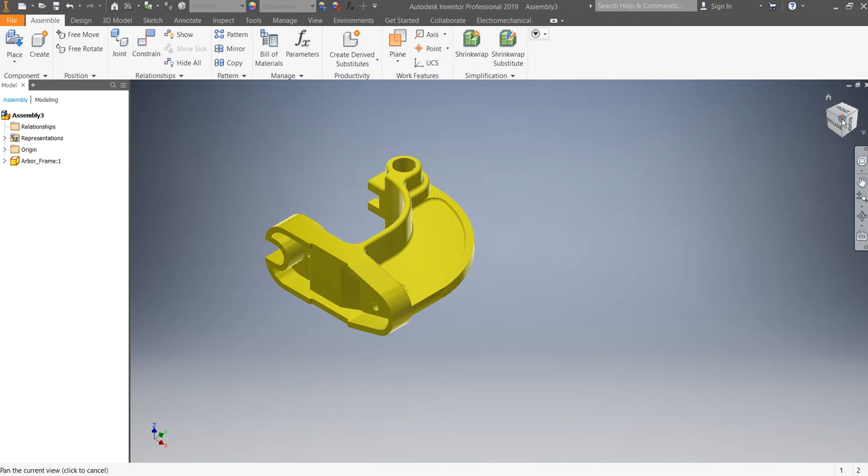At the beginning we have to select the proper view, or you can use orbit like this. Now I have to place, I told you as a designer you should know everything about your design, where is the first part, second part.

So I have finished the Arbor Frame. Now I want to place the plate, the gib plate and the face plate together. No need to place it twice, just once. Before that, I forgot to tell you that the first part, the jig or the arbor frame should be fixed. So I will click on the arbor frame, right click and make it grounded.

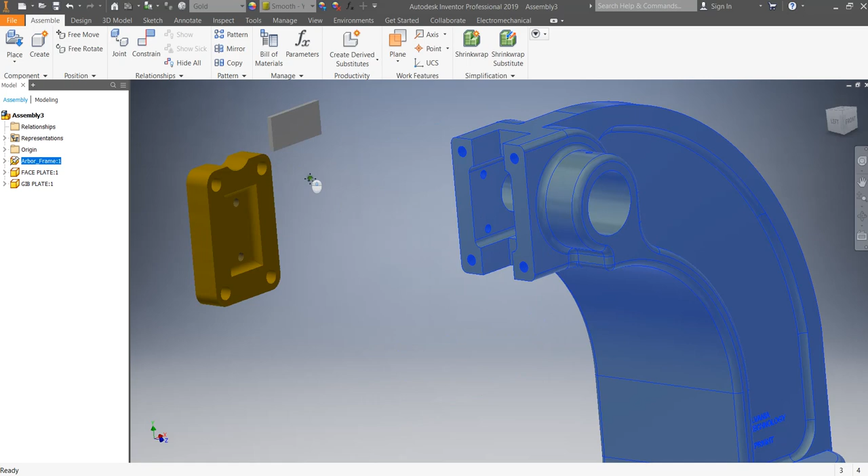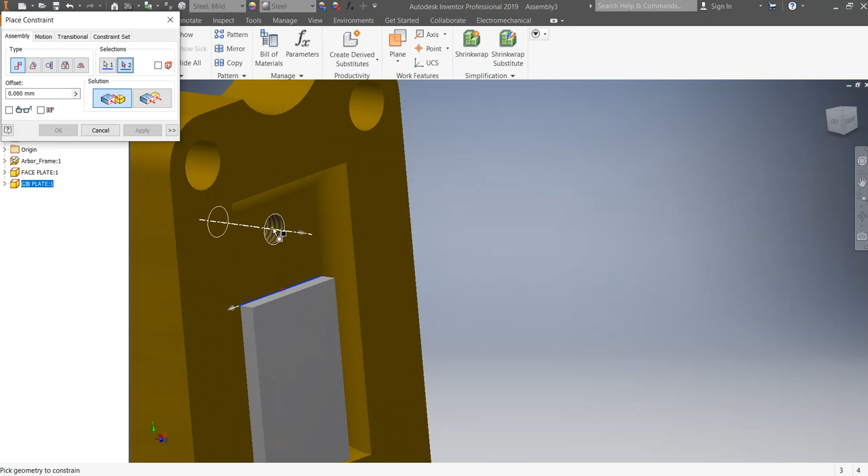Now I will constrain this plate. So this face will meet this face, apply, cancel, make it like this. Then constrain this edge. I want this edge to meet this edge, apply, cancel, move it that little bit down, constrain this edge to meet with this edge, apply, cancel. Now they are one part.

I know that this constrain this surface to this surface, so they are mating together. Then move it like this.

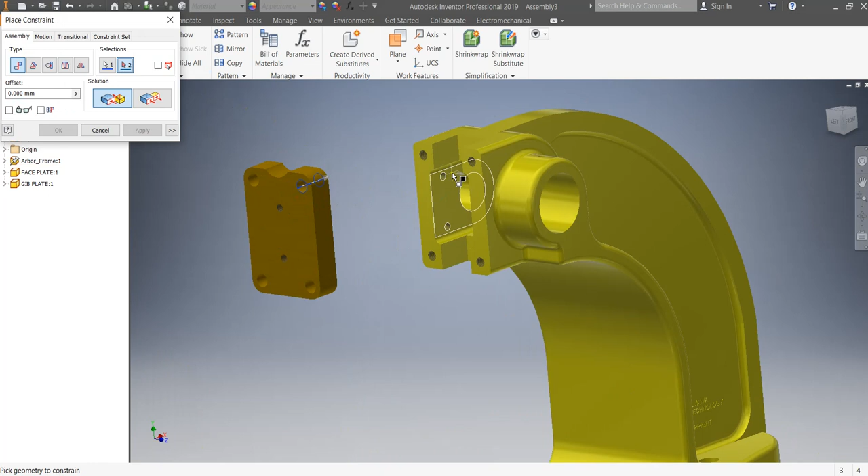We need two holes to place in two holes here. Constrain axis to axis, as you see, apply, cancel. Still it moves like this or rotate like this. We need the other one. Enough. Constrain axis to axis, apply, cancel. Now they are one part.

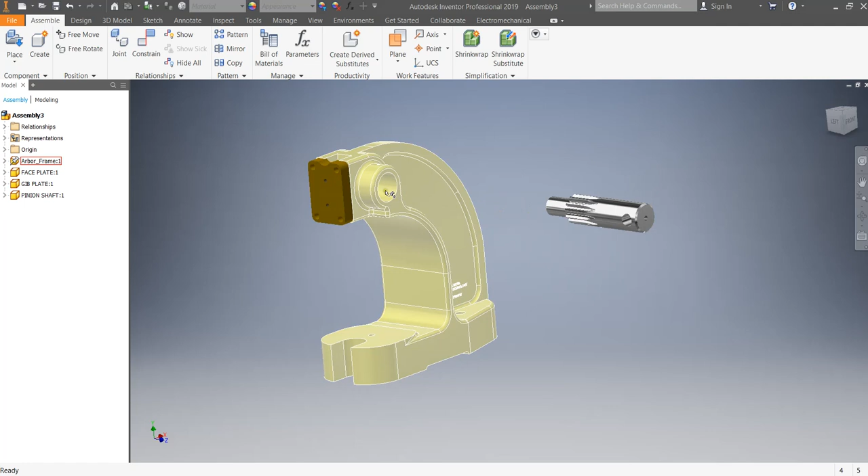Next I have to say place the shaft. We have here the pinion shaft. Place the pinion shaft and know that the pinion shaft should go inside this hole. See, these teeth should be used to move up and down ram. I will place it later.

So I will constrain axis to axis. Sorry, again constrain axis of the shaft with axis of this hole. Then we can constrain flush as example. Flush, make this surface parallel to this surface with some offset. I have to know the offset, how much, say that -20 as example.

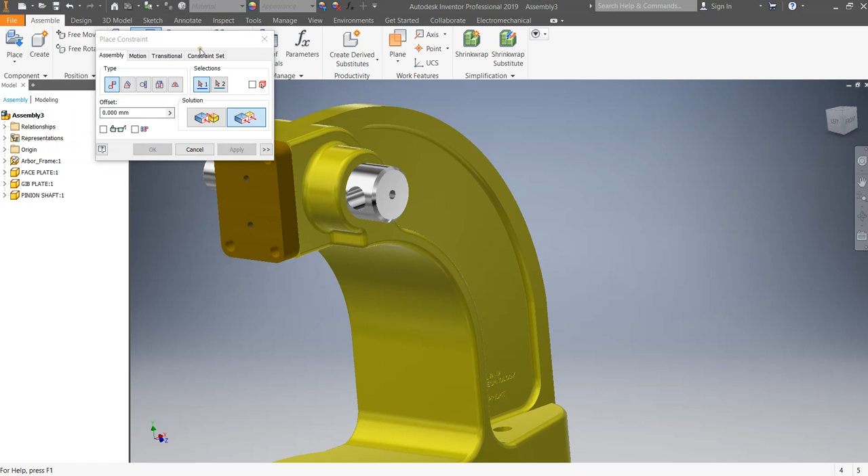I will show you from the left side view like this. Maybe the distance is too much. By the way, this distance is design information, should be known from your design. You have to know exactly what is the distance. So make it -30. I think it's okay. Let me check from top view how or where is the location of the teeth.

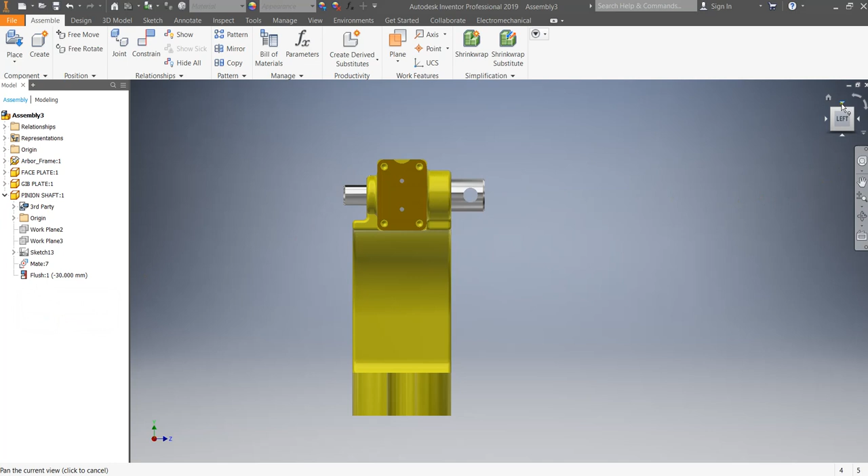Yes, it's okay. Next step, we have to place. Now let me place the ram.

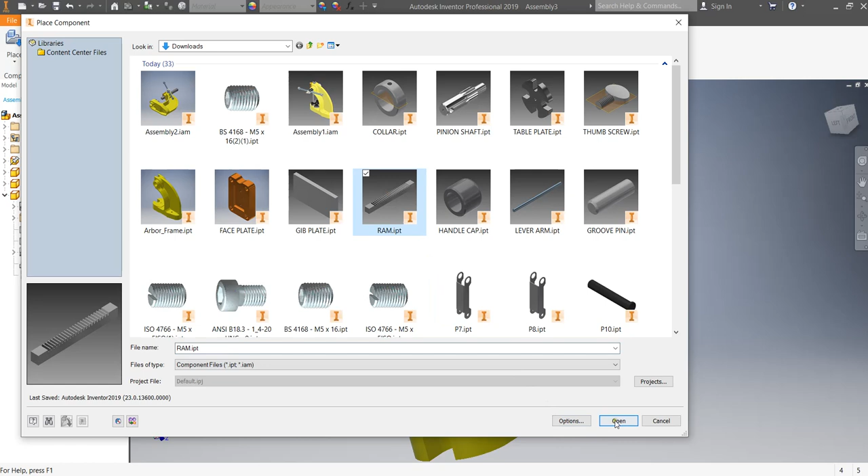By the way, we have another way to place the shaft. We can use, instead of axis and mate face to face by make them parallel, we can use the insert one. We will use insert later with screws and different things.

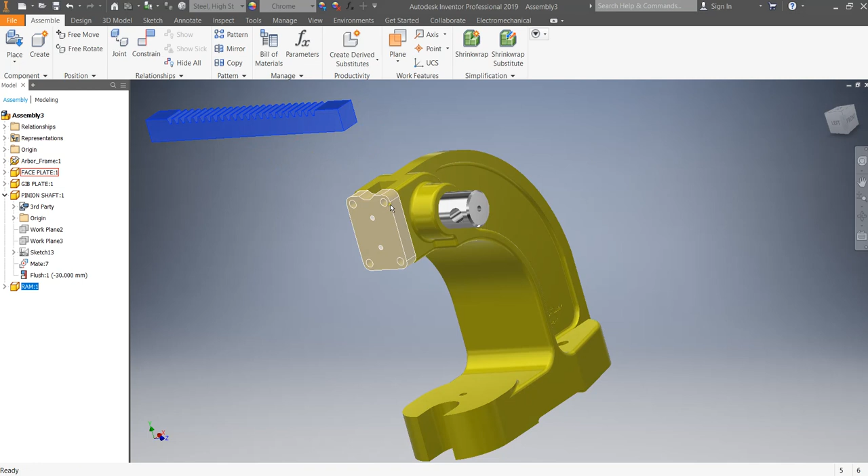Regarding the ram should go inside this hole or inside this gap, so we can go to free rotate and rotate the ram like this.

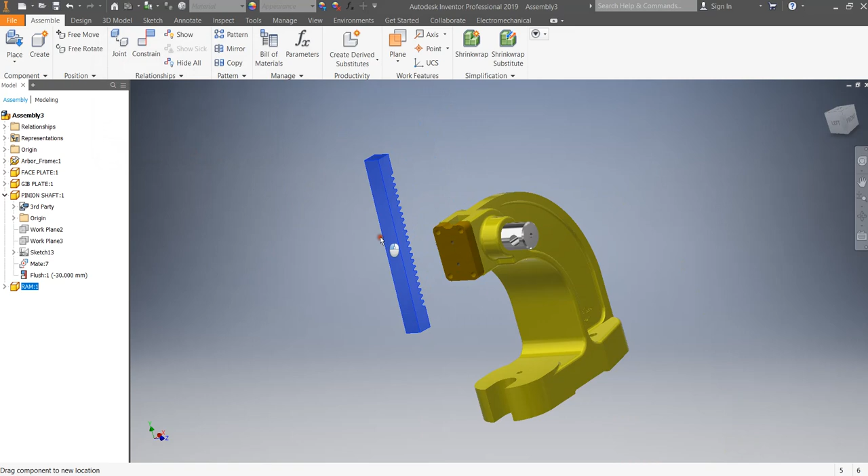For the ram, I want to constrain, mate this surface, the side surface with this side surface. Still, see, it can move in X direction. Actually, let me go and select orbit to move like this and free rotate the ram like this. We can constrain so that this surface mate with the plate surface, apply, cancel. Exactly, this is what we want.

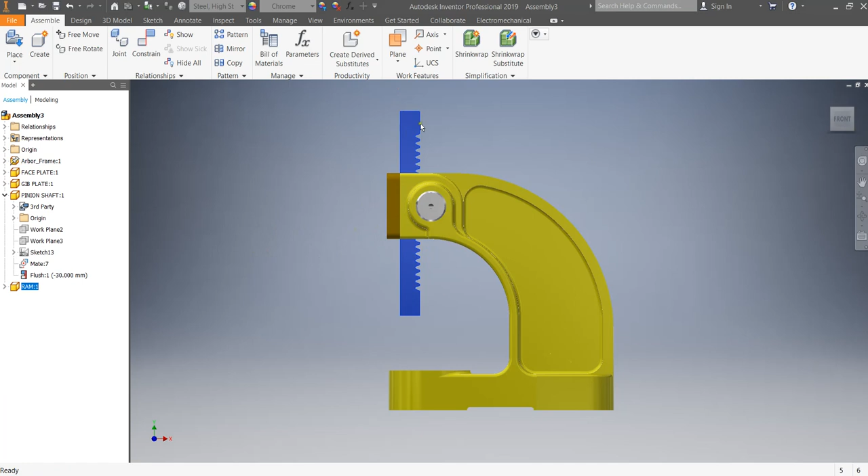I want the ram to go up and down only. I can't move it in X direction and Z direction, just up and down in Y direction. Now how the ram will go up and down? It should go up and down using the shaft. So the teeth of the shaft should join the teeth of the ram. When the shaft rotates clockwise, it will move up the ram. Counterclockwise, it will move down the ram. How we can do that?

We can go to constrain. We have motion constrain. We have rotation, translation. So I will select rotation, translation. I will select for rotation, I will select the shaft axis, and for the translation, I will select this line. You can select any vertical line, no problem. I will select this one, and distance is very important.

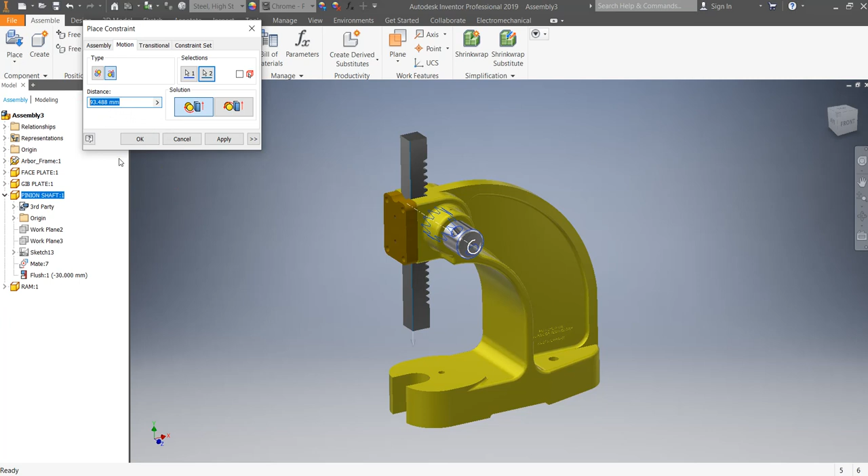By default it's 90, around 93.5. That means one revolution by shaft, the RAM will go up or down by 93.5 millimeters. This is design, say that quantity we should get it from our design. For our demonstration, no need to think about it now, just keep it like this, apply, cancel.

See, now like this. Next step, we have to place the handle that can rotate the shaft. So let me go and place the lever arm and put it here.